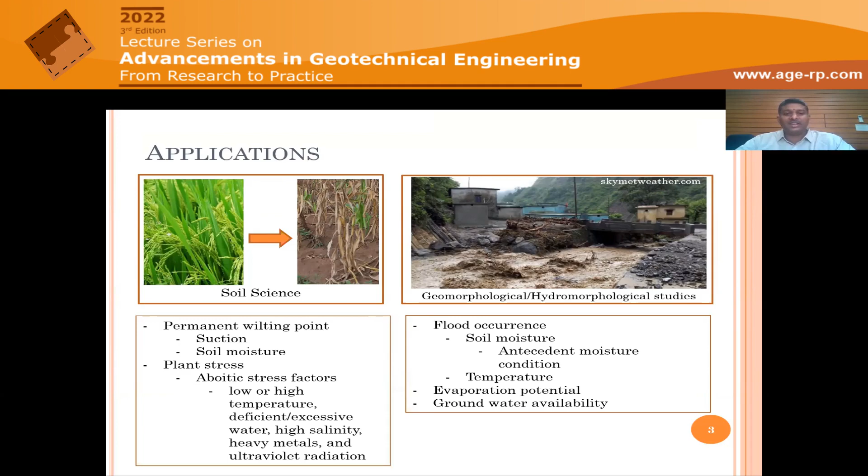This is a natural slope that exists in one part, where you have a certain vadose zone, a partly saturated zone. If rainfall takes place, there's runoff, and also some surface water gets in slightly, there's infiltration that takes place, and then this water gets into the surface water.

But due to development of infrastructure, we often construct roads or railways. To make that, we cut the slopes, and on the upstream side we try to protect the slope, while on the valley side generally this is left without any measures, or sometimes protected using breast walls.

In basic geoengineering aspects, if the weep holes are generally choked, if proper filter material is not used, or due to development of vegetation through the weep holes, high pore pressures are developed on the upstream side, and you see that failure takes place on this upstream side.

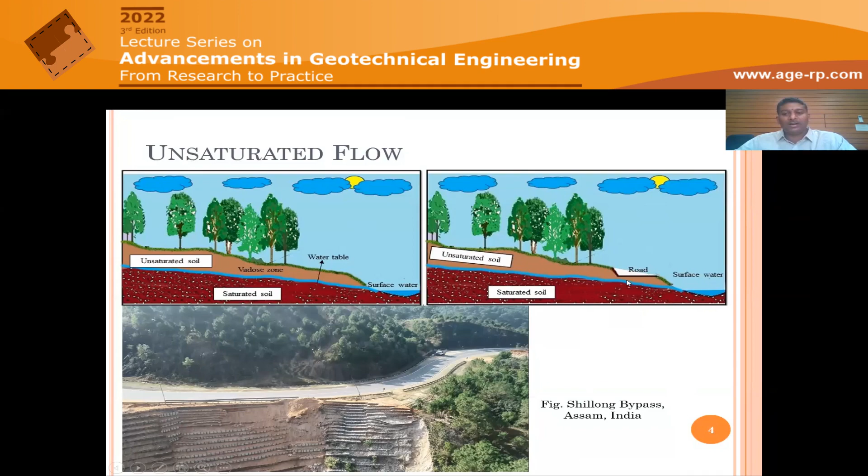If we are not well aware of the consequences of obstructing the flow of water, and the unsaturated soil principles are not met, a lot of destruction takes place, not just on the valley side or upstream side, but also underneath the road, for the first time, the soil underneath this road, the subgrade, experiences wetting under stress conditions, so you will see destruction sometimes.

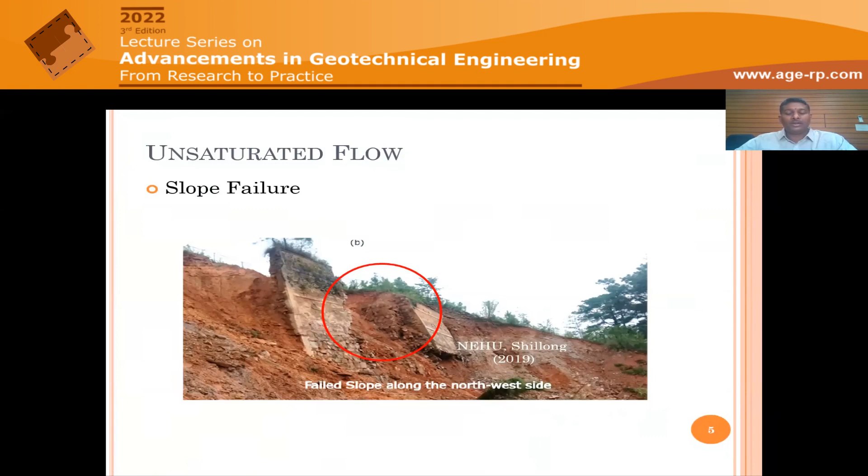This is another valley side failure in a nearby state called Meghalaya. These are some of the problems underneath the pavements, because water ingresses into the slopes and detours under the existing natural pavements, and when wetting takes place, either subsidence or heaving occurs, depending on the type of soil that exists, as Oliver would have mentioned regarding collapse behavior.

In these places, you see excessive amounts of kaolin present to deeper depths. Kaolin, when in the dry state, can take a lot of mechanical stress, but during wetting it immediately collapses. This is the destruction of infrastructure that has taken place due to that reason.

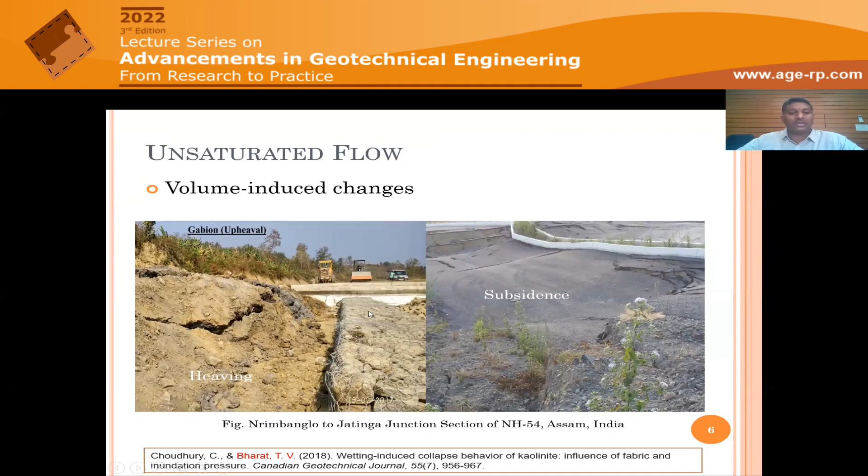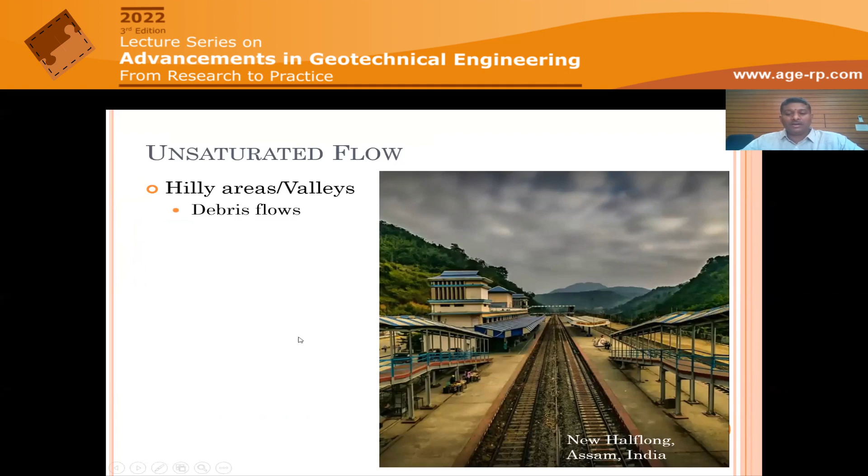When you see a lot of valleys surrounded by hills all around, there's a beautiful place in Assam where we reside, just 7 hours drive from here. The current situation, just a week ago, a debris flow took place. A lot of rain has been happening since February and March, but the rainfall during May destructed the whole thing. The entire debris flowed down the hills and submerged all the trains and a lot of passengers.

So this destruction is eventually related to the soil moisture levels in the slopes. Definitely, this has everything to do with unsaturated soil principles.

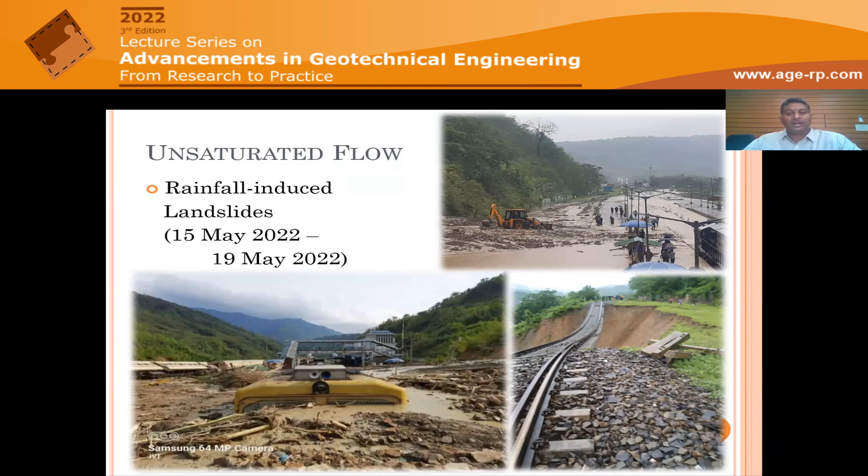Similarly, bank failures, often studied, and in landfills, the cover system made up of bentonite plus sand, if proper design is not made, the infiltration characteristics are not properly met, and because of the capillary barrier system, excessive water pressure will be generated within the top layer, and it can actually slide down and cause a disaster. So again, the unsaturated soil principles are required in this aspect.

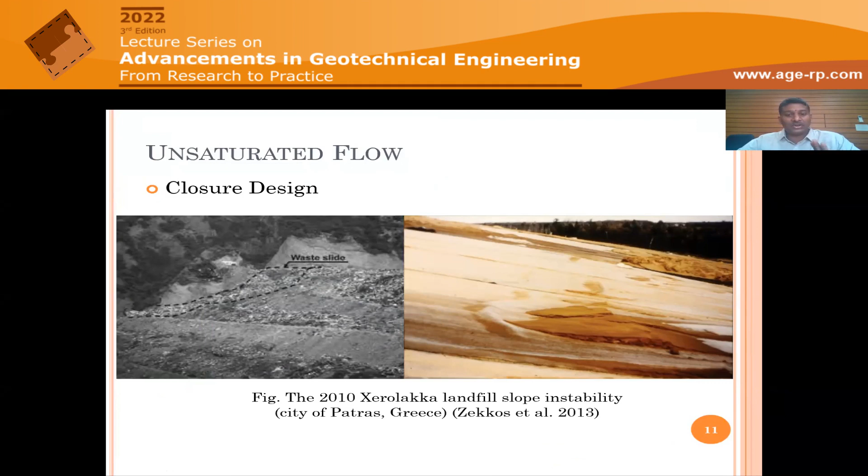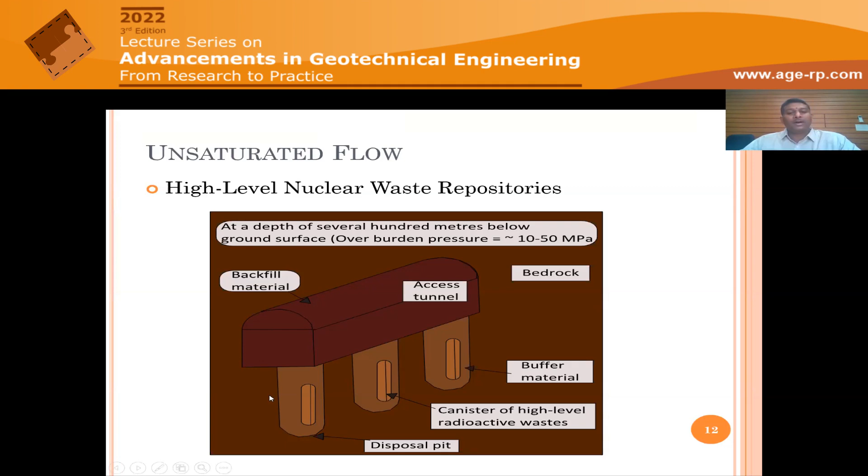And in case there's a breakdown of the canister, the high level radioactive elements that diffuse through the soils is also a very important aspect that has to be considered in the design of safe disposal of radioactive waste elements. So in this, the understanding of flow behavior through compacted bentonites is vital, and that too in our constrained environments and also partly constrained environments.

Similarly, this is an important application where in drought hit regions, to retain water in ponds, you can have a bentonite plus sand layer, and this would retain the entire water, because otherwise the water would have percolated into deeper layers, and this would not be reachable or extractable from the ground. So this can be retained using the simple mechanism of the capillary barrier.

So even after the breakthrough, because sand is dry in the beginning, water simply tips down, and again sand is in dry condition. So only small amount of water passes, because we know the saturated hydraulic conductivity of bentonite is less than 10⁻⁹ meter per second. So very small amount of water percolates through the sand layer, and then because of the capillary barrier, water gets suspended at the interface. This is a project I handled 10 years ago.

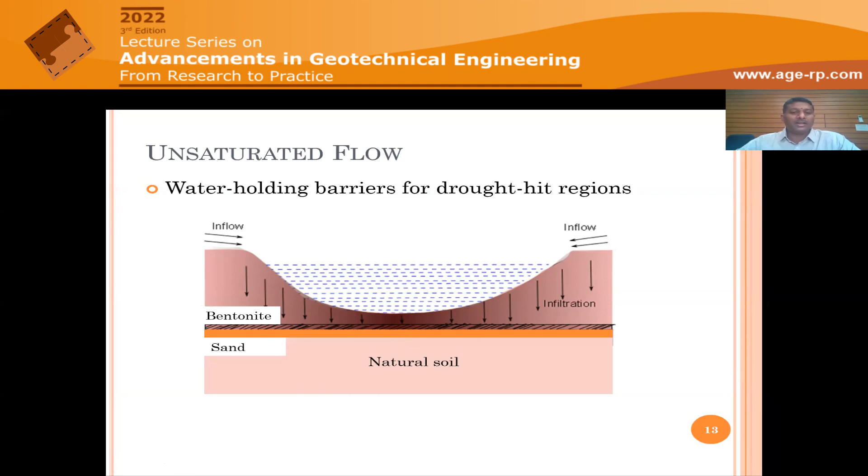And similarly, capillary barriers are catching up currently, and are popularly used in Singapore. We had a lecture by Professor Rahardjo yesterday, so I'm not discussing about this. But there are plenty of applications, and the basis for this flow behavior again comes from soil science. This is not very new, though what we have understood is after developments that have taken place in other disciplines.

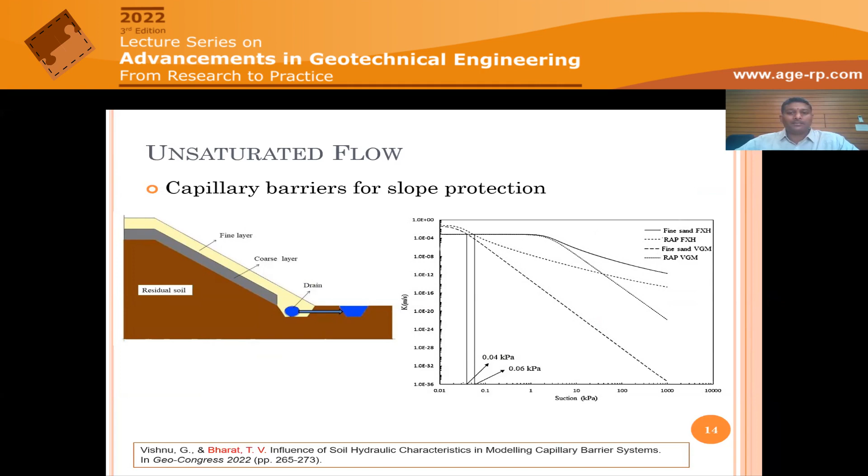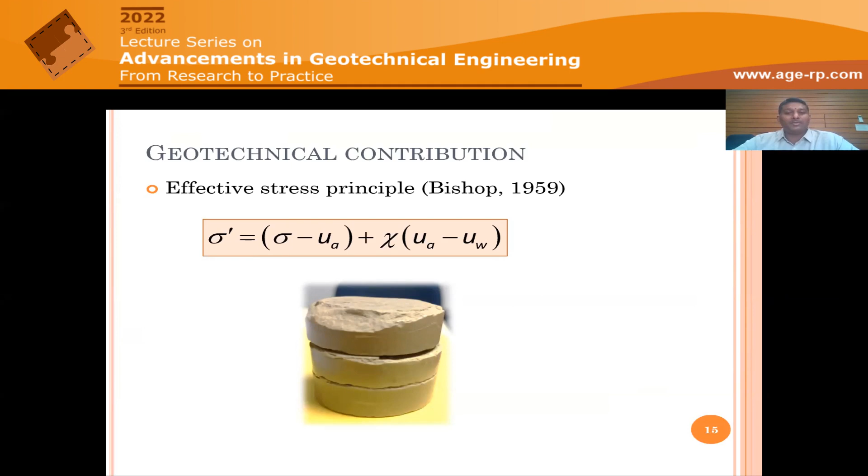So the major contribution, if I can note down, is the development of the effective stress principle by Bishop, because Bishop's effective stress principle can be used to understand the shear strength behavior of partly saturated soils, and later developments can be summarized into the same effective stress principle given by Bishop. So this could be the best, most independent contribution made in geotechnical engineering, I feel.

So coming to flow, I'm interested in discussing the flow behavior in clay soils, because a lot of misconceptions are there in understanding the flow behavior in soils in geotechnical engineering. I'll try to address those issues today.

So when we discuss flow behavior or any other behavior or observation that we make to develop a mathematical model to understand the behavior, first we need to understand these fundamental principles. We have certain governing equations such as mass conservation, linear momentum conservation, angular momentum conservation, etc. These are the fundamental equations that have to be satisfied in any formulation of a mathematical problem.

So first we have a physical observation, then you talk about a governing equation which is responsible for that physical observation. For example, if there's a flow taking place through a mass of soil, you pick the conservation of mass. And if there is swelling also taking place at the same time, you also pick the conservation of linear momentum, so force equilibrium also has to be considered. And then you formulate the governing equations.

And these governing equations are not sufficient to solve your problem, because there are material related uncertainties that come in, so you require additional equations. For that, you identify the state variables. For example, when we talk about flow through unsaturated soils, we consider the conservation of mass. If the flow takes place through a soil mass where no volume change takes place, our force equilibrium is satisfied, then we consider the conservation of mass. And if you combine with Darcy's law, what you get is the Richards expression, given in 1911, when soil mechanics was not yet formalized as a separate subject.

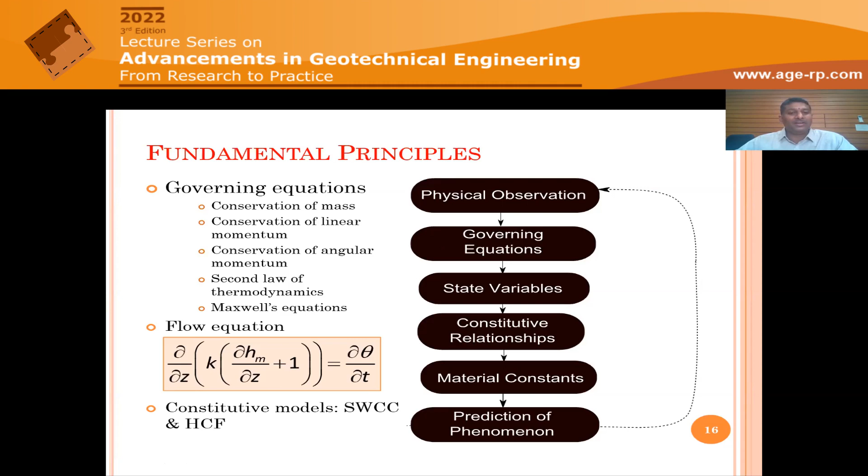Going back to the Richards expression, this is a partial differential equation, and there are two constitutive models here: one is the hydraulic conductivity function, the other is the soil water characteristic curve. The soil water characteristic curve is a relationship between matric suction head on the x-axis and volumetric water content on the other axis. This equation is in fact similar to effective stress versus void ratio, because as effective stress increases, the void ratio decreases.

Similarly here, as matric suction increases, the volumetric water content decreases. However, there is hysteresis, and the drying and wetting behaviors are different.

Similarly, hydraulic conductivity is related to matric suction, and this behavior is also similar. Often we have statistical models or pedotransfer functions to derive hydraulic conductivity functions from the soil water characteristic curve itself, knowing the pore size distribution models. Generally these are pore size distribution models.

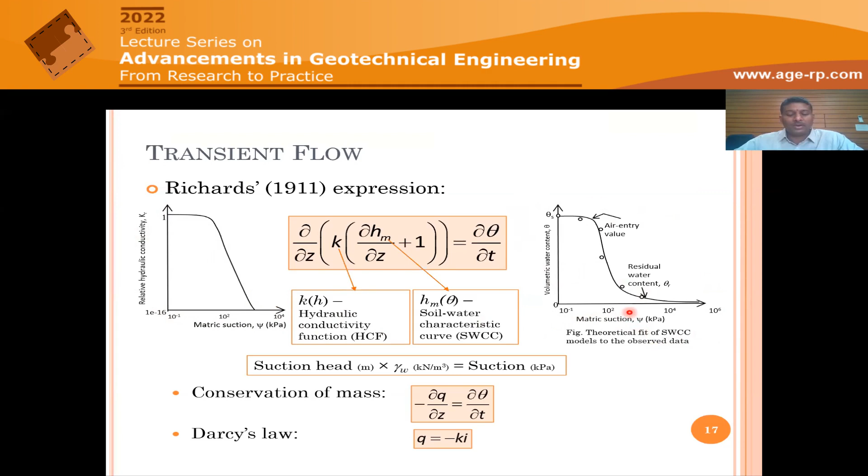Before going into those discussions of the soil water characteristic curve and other things, let me first briefly explain what is soil water potential or suction. Suction or soil water potential for partly saturated soils is a negative value.

The soil water potential is negative because of the capillary forces or capillary potential. When a capillary exists, it sucks the water because of the surface tension forces, or adhesion forces, which also predominate.

Similarly, in a clay system with a diffuse layer, when you initially have exchangeable cations on the surface and bring the particles into water, the ions can diffuse away because the concentration of ions near the particles is high compared to the bulk solution. So the ions should move away from the particles, but because of electrostatic attraction and affinity, the ions cannot move away. So then water has to come in.

So water is sucked in close to the particles, and because of the development of osmotic potential, they can swell also. The swelling mechanism in clays is because of this reason, due to the osmotic potential that is available. So there is capillary potential, osmotic potential, and similarly hydration potential.

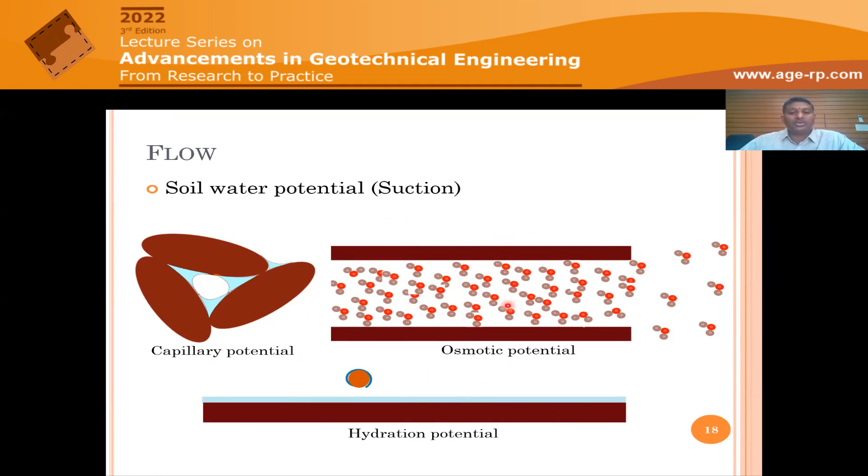Certainly there is a difference when you consider sands or other silts and sands, coarse grained soils, or even fine grained soils which are not active clays. Then capillary potential is the major dominant phenomenon controlling suction in the soils. But when you have active clays, the osmotic potential and hydration potential also significantly contribute to the suction.

Now, to establish the SWCC for the flow behavior, we have several equipments or instruments, starting from tensiometer, axis translation, osmotic technique, etc. So many things are there.

Most of the techniques have been developed in soil science, and we've simply taken and been using them. They have some practical limitations. Often the tensiometers are very handy; you use them in landslide monitoring systems where you simply push into the ground.

And then keep monitoring the suction values. Similarly, you also measure the volumetric water content or moisture content. But the tensiometer has a limitation: maximum value is theoretically 100 kilopascal, but it could be less depending on atmospheric conditions, RH, etc., because cavitation pressure controls the maximum range of tensiometer application.

Similarly, the fixed matrix porous ceramic disc, which is claimed to measure suctions in the whole range - these two are widely used currently in the field because others cannot be used in the field. They're all laboratory techniques.

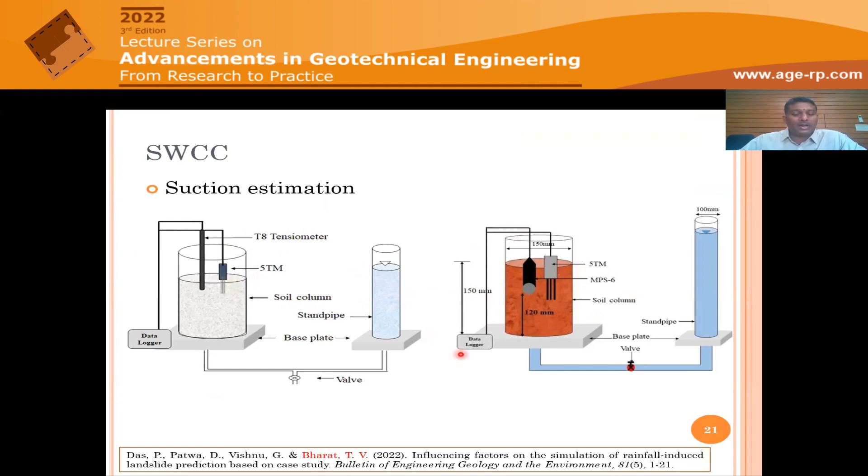If we do that, what happens? Let us see. First of all, the measured suction values are the rate at which the suction changes, because these are all instantaneous values. The equilibrium value is what you require.

They keep changing depending on the initial moisture content within the soil and also the initial condition of the sensor, whether the sensor is wet or dry and the soil is wet or dry, and what percentage of wetness or moisture content is available. Based on that, the tensiometer requires a huge equilibration time, in some cases even 10 days for compacted clay soils.

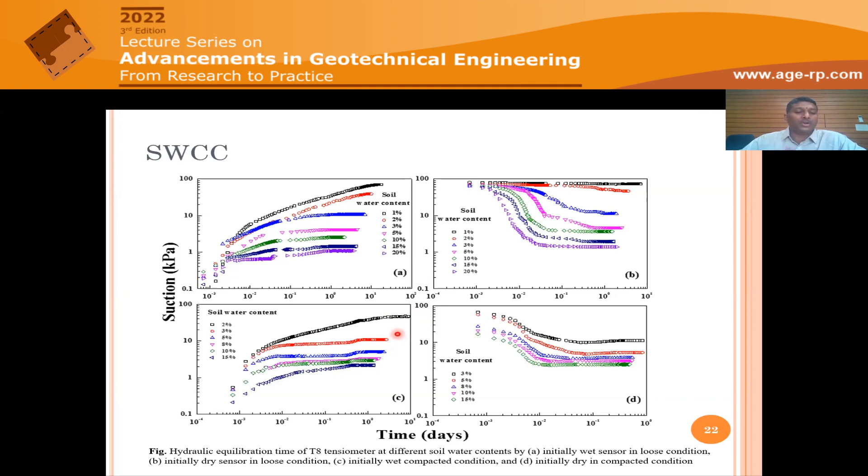Compacted clay means a lateritic soil from one of the hilly areas - we extracted the soil, compacted it in the laboratory, and measured the moisture contents as well as suction values. But here only the suction values are shown because moisture contents are fine; moisture sensors are very good to instantaneously measure moisture content. There is not a big problem with moisture measurement, but suction measurement is a huge issue.

If I try to establish volumetric water content versus suction in this manner, it's a very fast, instantaneous process - within 30 minutes I can obtain the entire suction profile and water content profile. Then I can draw the suction values corresponding to a given water content and establish the soil water characteristic curve. This is an instantaneous approach versus an equilibrium approach which takes around 60 days for one particular soil, because it has reached true equilibrium.

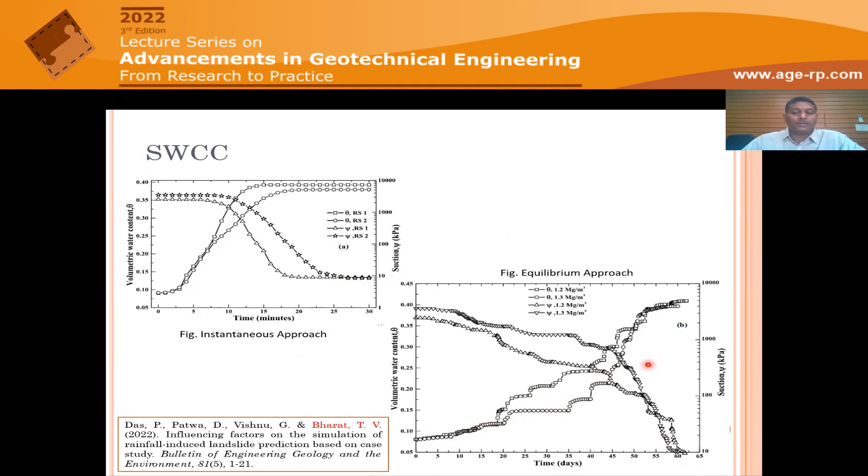After that, again you change the water content of the soil, and again you change the water content of the soil. So it takes time in each step, and in this way it takes an enormous amount of time.

What you see is when you predict the landslide or the factor of safety, even the instantaneous approach, which is highly conservative, doesn't predict the landslide until the 220th day or so. But the equilibrium approach predicts it within the 27th day or so, and this exactly matches a field observation - there was a failure that occurred in Meghalaya.

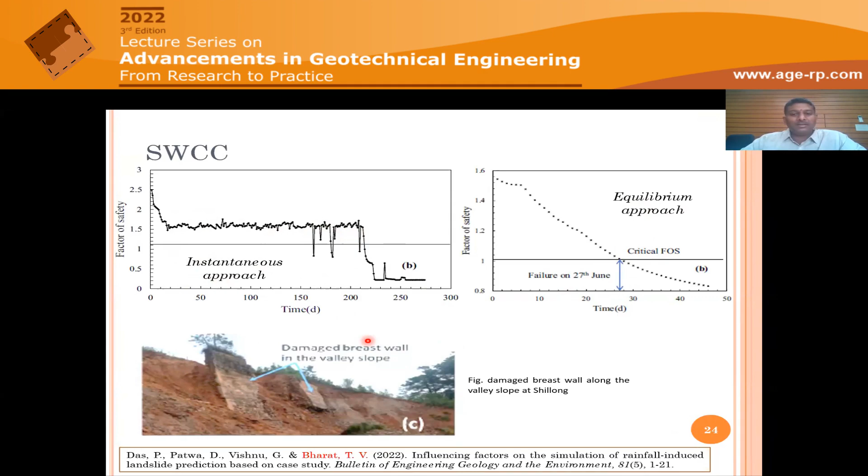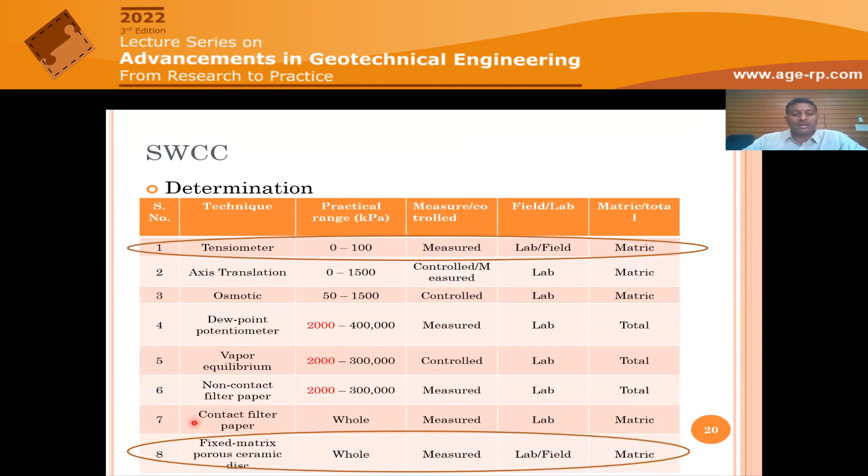So it seems these approaches are similar for the fixed matrix porous ceramic disc too. In fact, this takes even more time, especially in case of active clays. With this observation, let us move on.

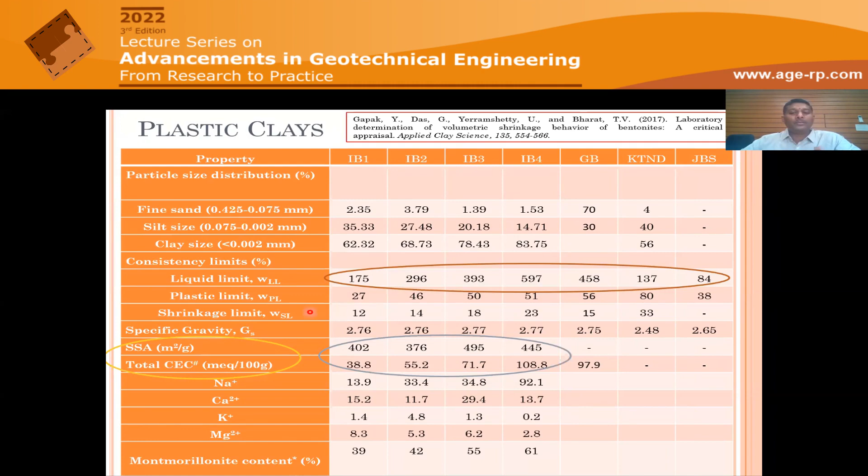Now the question arises: if the estimation of SWCC is so complicated in case of silts or low plastic clays, then what happens in case of high plastic clays? Because these two constitutive relationships are important for estimating the flow behavior through the soils.

There's one particular technique called the osmotic technique, which is also available in the literature and quite handy in those cases, because plastic clay layers can simply be put in a semi-permeable membrane, tied, and then placed in the polyethylene glycol solution, PEG solution.

PEG solution has a certain concentration, and the initial state of the soil could be anything. For example, here the Indian bentonite is placed at water content 1.5 times the liquid limit water content consistency, so this is a fully saturated soil.

When it is kept in the PEG solution, the PEG solution has a certain concentration, so it has a certain potential, and potential here is 0. Negative potential is not there, there is a 0 potential. So here potential is lower because of higher concentration of PEG solution.

Because of the potential drop or potential difference, water is drawn from the soil and comes out, and the PEG solution concentration changes until there is an equilibrium between the potential in the soil and potential in the PEG solution. So if you can measure the potential or suction value or the concentration of the PEG solution, we can understand what is the suction in the soil at equilibrium.

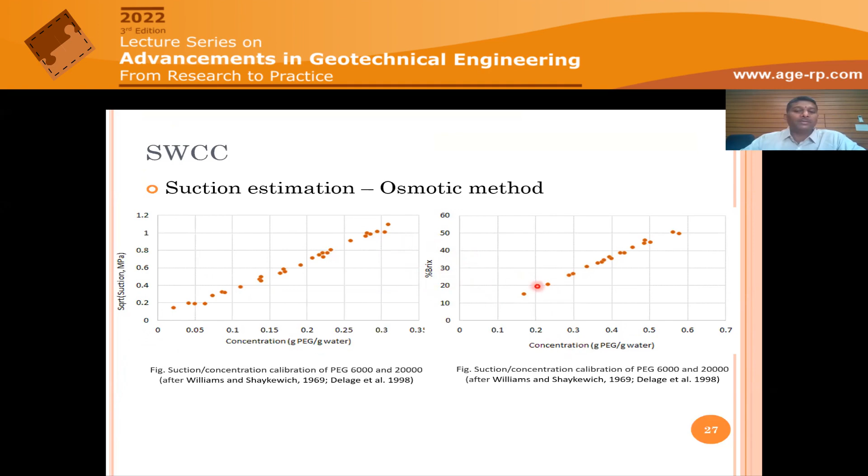You can measure the Brix index, which is in fact used for alcohol quality, and the same thing could be used here to measure the concentration. From the concentration you can estimate the suction values.

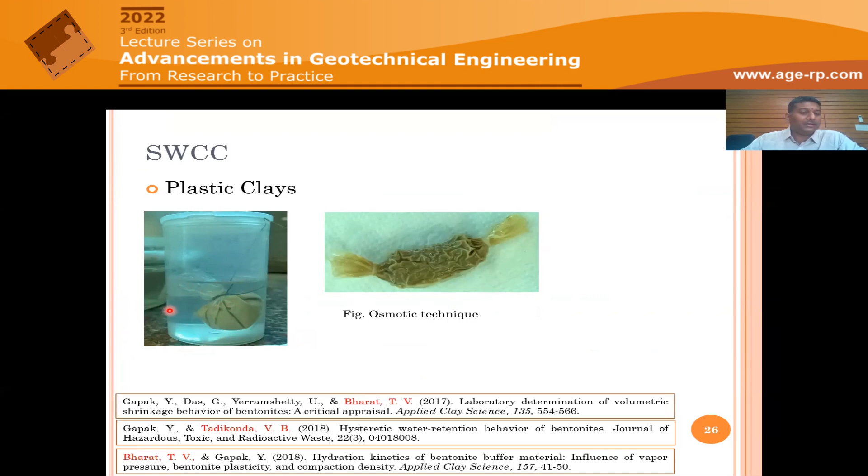Similarly, there is a limitation again: you have a maximum concentration that you can go for, and also the pore size cutoff value of the membrane. Here you can hardly go for about 2000 kilopascal, but if you go for a 6000 cutoff value of the membrane, and have a PEG molecule size larger than that, you can even go for 4000 kilopascal suction range. Beyond that, if you want to go, you require a vapor equilibrium technique.

The vapors of these salts can exhibit a huge, very low RH, as low as 11.3 RH, and the corresponding temperature could be 25 or anything that could be maintained. From Kelvin's equation, you can estimate what is the suction that is imparted on the soil.

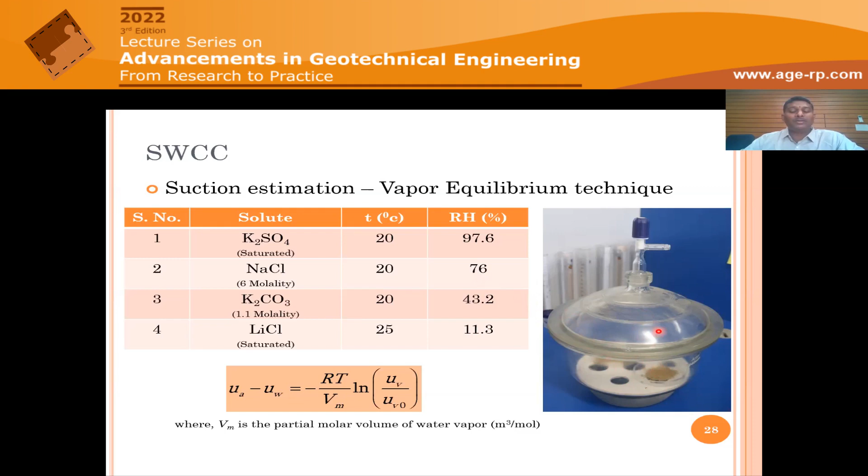You will have saturated salt solutions underneath, and you create an RH environment, just like in an air-conditioned room. When you are sitting, you feel thirsty because RH is low, around 70 or so, so that much suction is exerted on your skin pores. Similarly, the soil is experiencing a certain RH, so water has to leave because it has to come to equilibrium with the atmosphere. Similarly, you can estimate the suction values.

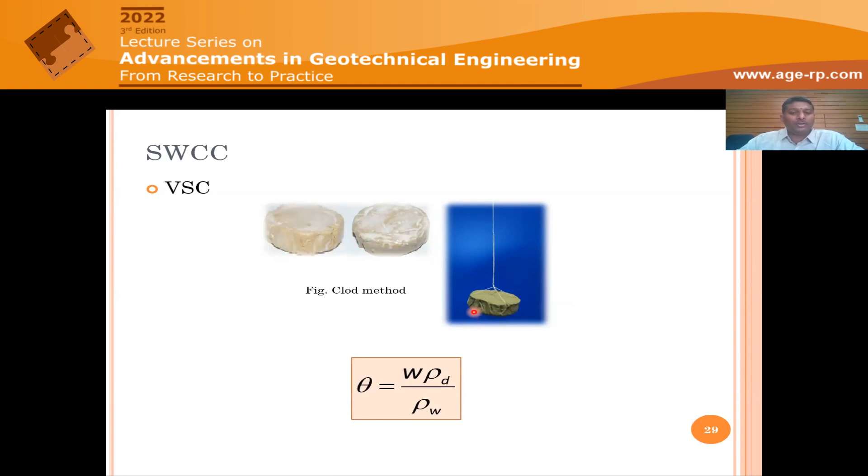But in case of these active clays, you also require the volume changes that happen, which can be estimated independently using the clod method or something, where you can coat it with Fevicol or any other glue, polyvinyl acetate glue, PVA glue, and then directly dip it in water or kerosene, and measure the volume, the displaced volume. From that you can estimate how the volume is changing in the soil sample.

But here, one thing we have done is the volume is not constrained, it is simply allowed to change. This way, in fact, you can get a number of cycles: there is an initial drying, and then you can get a primary wetting, primary drying, secondary wetting, all those cycles you can get.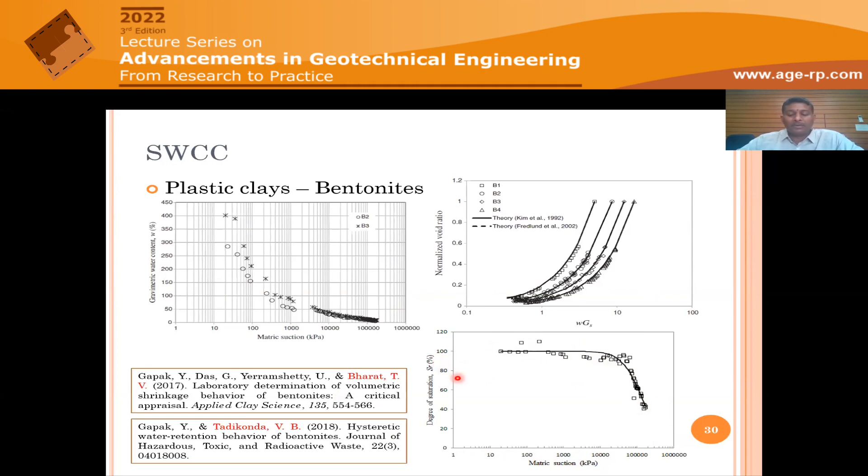But there is a catch, I will soon explain. So what happened in compacted conditions? In compacted conditions, similar experiments can be conducted with PEG solution and vapor equilibrium techniques, where salt vapors are circulated around the clay sample so that it comes to equilibrium and achieves a certain suction value or water content.

By weight, we can measure the water content, and using the salt solution RH, the salt solution can directly be taken and kept under the WP4 or dew point potentiometer, and you can measure the RH values directly, and estimate what is the suction that has been imparted on this clay sample, and establish the soil water characteristic curve.

But then one issue with the PEG solution osmotic technique is that longer exposure of PEG solution with the membrane can cause damage to the membrane, and PEG can enter directly into the soil. Especially after 10 to 12 days, the PEG solution can directly enter because of the attacks of the microbes.

There's a lot of research going on currently, but in the 70s there was already a solution. You can use penicillin along with the PEG solution to prevent microbe attack, and then it can be used for 30 days or so, because reaching equilibrium takes longer in a compacted bentonite system.

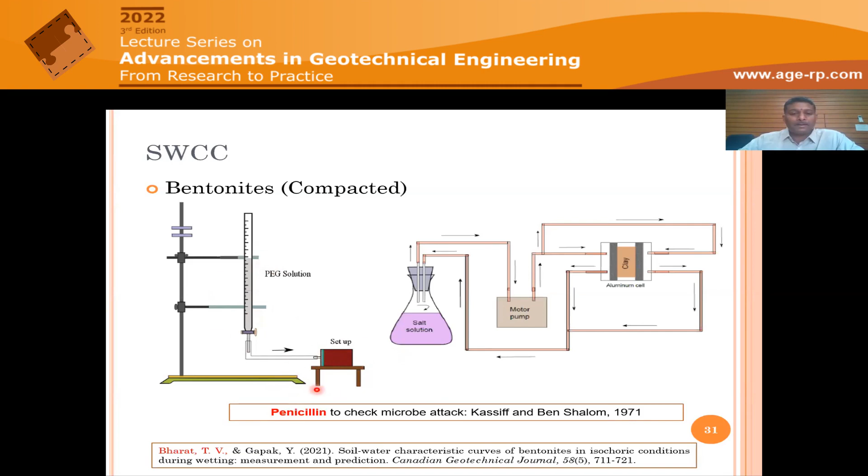For compacted bentonites at different densities, I'm showing you the relation between water content and suction values, from osmotic technique and vapor equilibrium technique for different densities. When you directly convert into degree of saturation versus suction, it's easy because volume is constrained and constant in your case, so I don't need to estimate volume changes using any other technique. Since volume is constant, I know the void ratio, the water content, and the specific gravity or density of solids.

Interestingly, if I estimate this, the degree of saturation goes beyond 100%. This is not an isolated observation from our group; other researchers, like Villar and others, have also observed the degree of saturation going beyond 100% in compacted bentonites. So what could be the reason? This has been a topic of great debate and interest in soil science, mainly attributed to changes in the density of water.

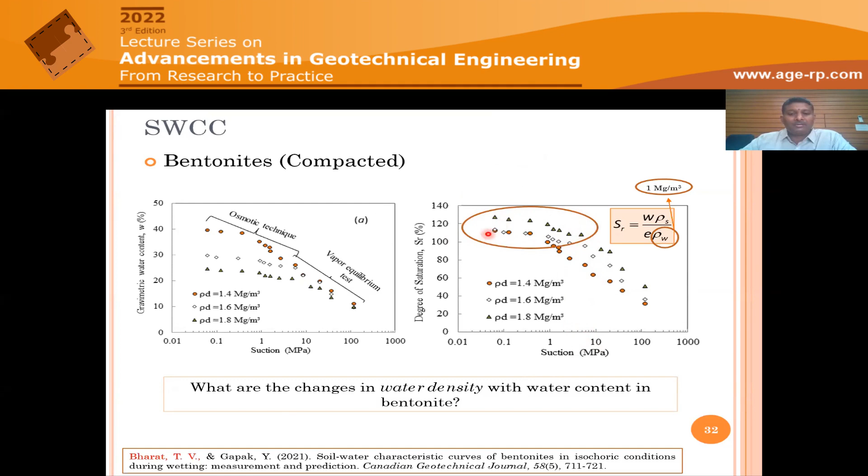The density of water considered here is 1 megagram per meter cube. When you consider that, the degree of saturation estimated close to the saturated state is around 130%, for higher density, and lower for lower density. It meets the 100% saturation line nearly at 10 MPa, or between 5 and 10 MPa. This observation is very interesting and is attributed to changes in water density.

In the literature, since the 1960s, soil scientists have observed that water densities can increase beyond 1, even up to 1.4 megagram per meter cube, where water content is less than 10% in bentonites, montmorillonite clays, and kaolinites. The density approaches 1 megagram per meter cube or less with increase in water content, as observed by Richards and Bouazza using several experimental observations, including helium gas displacement pycnometry and buoyant force measurements, which measured how water density changes with soil water content.

But most of these observations are simply from a few particles, measuring how density changes—not from a compacted system with micropore and macropore structure. These are some observations on bentonites and MX80 bentonites showing how water density changes; with increase in water content, they approach 1. This is an observation made by Lloret for FEBEX, going beyond 1.

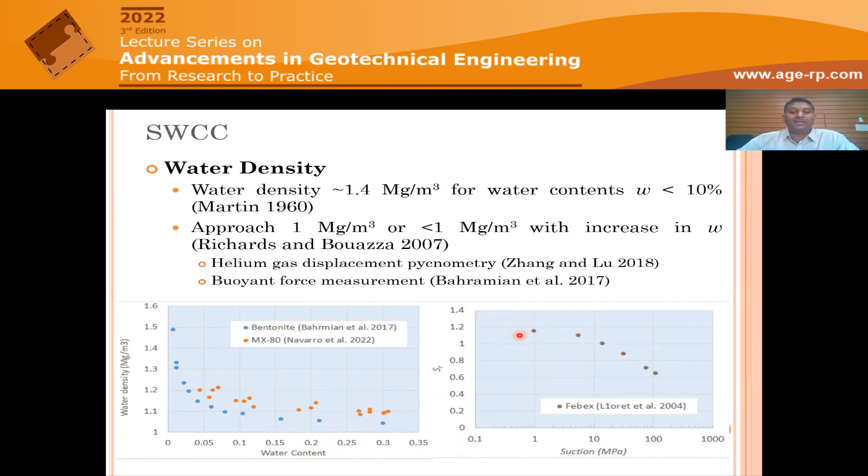There were some attempts to correct the degree of saturation for clays, proposed by Villar in 2005, based on the concept of liquid multilayer structuring. Close to a clay particle, the first layer of water strongly adhered to the particle has a density close to 1.8 megagram per meter cube. Moving away from the particle, the water density decreases and reaches 1 at the bulk solution. You take mean values, since multiple layers of water molecules exist around the particle—first layer 1.8, then an average of 1.8 and 1.5, and so on—to make the correction.

But with such corrections, the important observation is that the water entry point, similar to air entry suction, is nearly negligible—there is essentially no water entry for compacted bentonites. Is that strange? Water entry should be very high, around 5 to 10 MPa for bentonites, but here it's negligible, maybe just a few kilopascals.

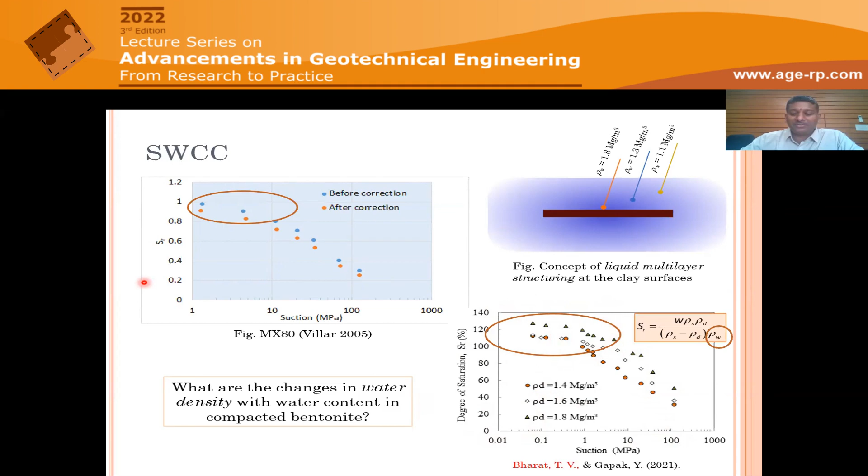So there is a huge debate taking place on how to adjust or understand this behavior, and currently this is inconclusive. With this inconclusive statement on the SWCC of compacted bentonites, I move ahead to explain the hydraulic conductivity function, because these two constitutive relationships are required for the flow behavior. Just reminding you why this is required.

Coming to the hydraulic conductivity function, it is a relationship between hydraulic conductivity and suction. The only popular method employed in the laboratory is the multi-step method, but this is not suitable for clays. It is best suited for sands or other soils, because the volume of water that comes out due to application of suction is very small, cannot be measured, and takes enormous time in the case of silts. Good luck if you want to measure it for active clays.

It's not possible, right? So this expression is actually an analytical solution of Richard's expression, considering D constant with Z. This is given by Gardner, and this expression is often used in the multi-step outflow technique for estimation of conductivity.

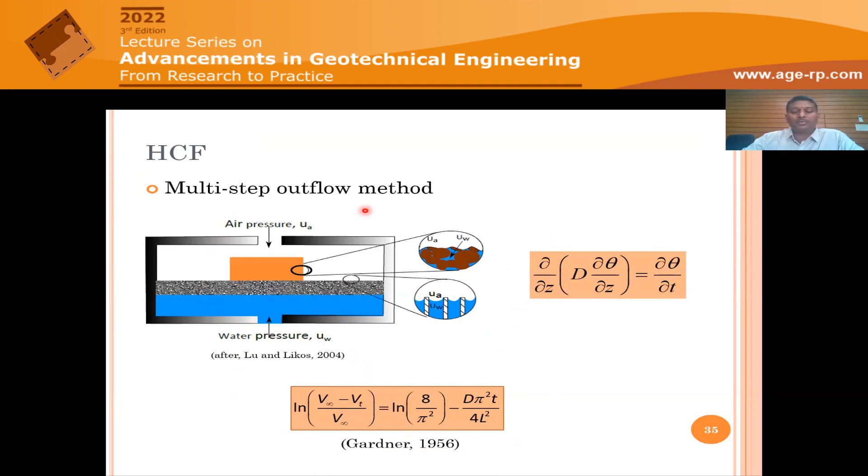Another method receiving a lot of traction in geotechnical and geoenvironmental engineering for compacted bentonites is the instantaneous method. Since 2008 or 2009 it has received a lot of traction, but if you trace back the origin, it's from Daniel, 1982-1983. Further back, it goes to the 50s or 60s. The method involves very simple steps.

If this is a compacted bentonite column or sample, you cannot have a big column because the flow behavior is very slow; flux is very slow. So you cannot afford a very long column—this is a small column. Psychrometers are placed at different locations on the perimeter of the column, and a water source is allowed to go in, with a vent. Instantaneously, you measure the relative humidity at any given spatial location within the soil sample while water flow is taking place.

So instantaneously you can draw how the water suction value is changing with time. Once that is known, you can establish the gradient by understanding how suction changes with spatial location X. Then the average flow rate can be obtained by integrating how much water has passed beyond a particular location, say Xi, to L—beyond this location, what amount of water accumulated over a given time. Based on that, you get the average flow rate, and by using Darcy's law, you get the hydraulic conductivity.

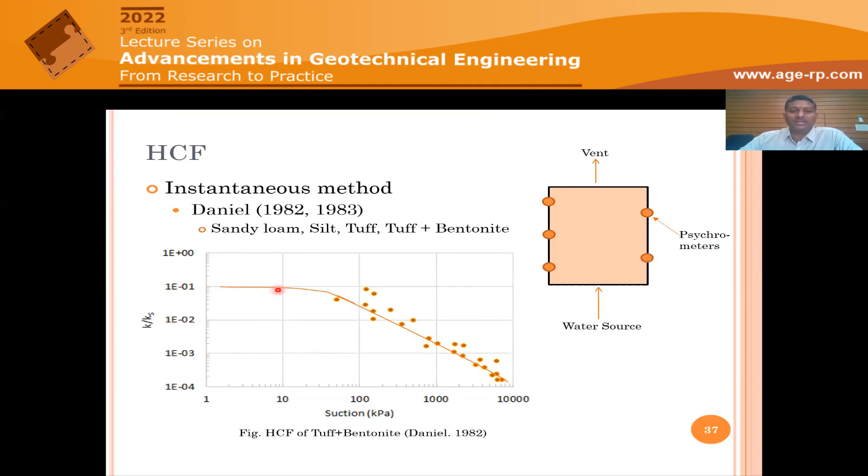This method was used for sandy loam, silt, tuff plus bentonite, and other soils in the 80s, and it gained a lot of traction for estimating the hydraulic conductivity of bentonites. If you look at hydraulic conductivity or relative hydraulic conductivity with respect to suction, the changes are as expected, because several orders of magnitude of hydraulic conductivity change with increasing suction—up to 10 MPa. So this is an expected trend, a typical hydraulic conductivity function curve.

So if you think this is an experimental error, but this is claimed to be an important breakthrough in the science, a lot of following works in fact also reported and supported this statement that hydraulic conductivity will increase with increase in the suction, that too at what suction? At around 70, 80 megapascal suction.

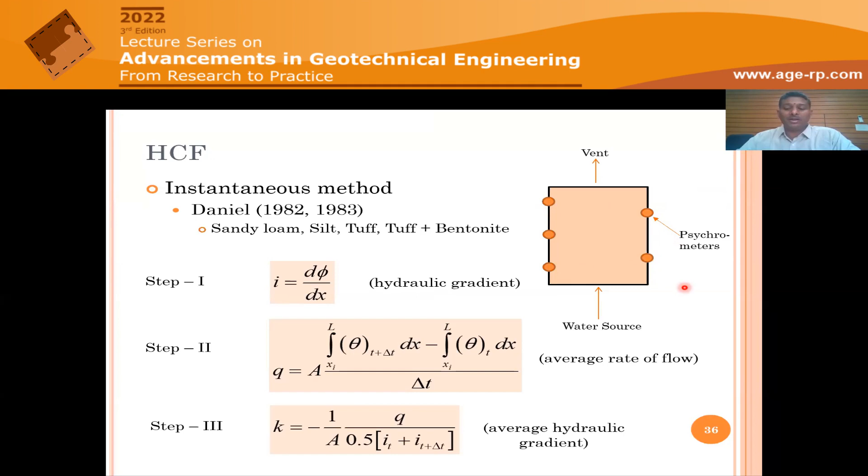But here you are measuring instantaneously the RH values, that too in bentonites, which generally takes several days to come to equilibrium with your instrument, but you're completing an entire test within few minutes or few hours. And that is the error that is actually propagated, and then you started observing that with increase in the suction, hydraulic conductivity is increasing.

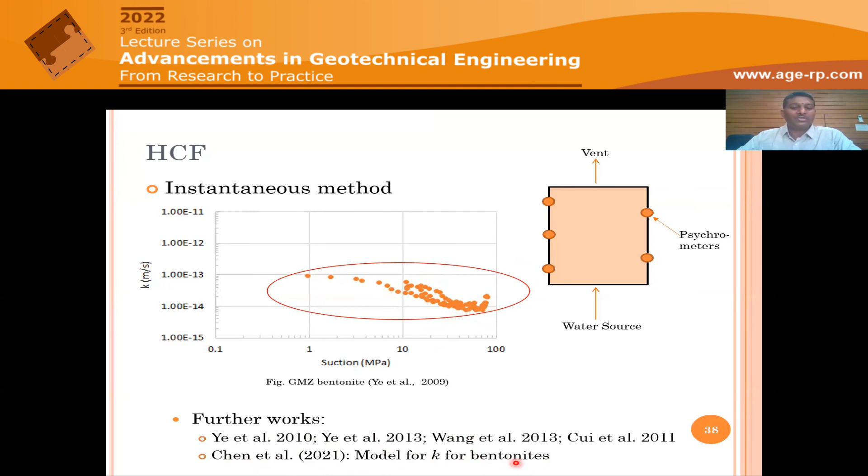In fact, the interesting part is that there are several researchers, without understanding, maybe falling prey to this particular observation, who developed models for hydraulic conductivity changes, for decrease and increase with suction values. This is published in Geotechnical and other reputed journals. These things are available.

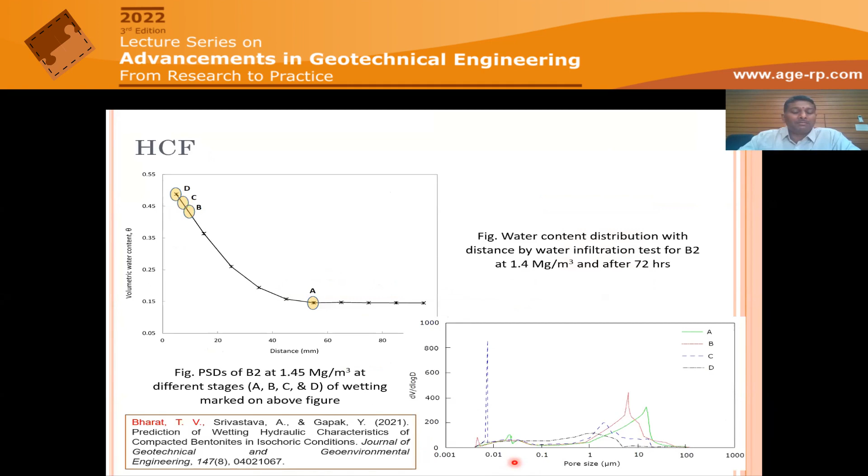So I believe that this is purely a problem with the measurement of suction instantaneously. And if you adopt the proper technique, you see that with increase in the suction, the hydraulic conductivity is changing in the manner you expect. A standard trend is followed.

But the question comes now, how sure are you about this d-theta by dh or dh by d-theta? Because diffusivity is fine, we have simply measured and estimated it from water content observations. But hydraulic conductivity can only be established using the slope of the SWCC. But the slope of the SWCC for compacted bentonites is inaccurate because the water density is not corrected. How sure are you about it?

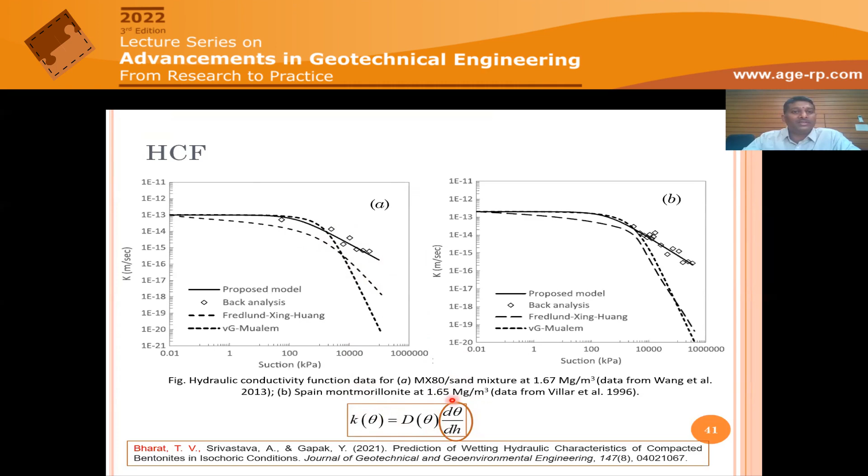But whatever the kind of slope you consider, the trend will be similar. Although it may be decreasing faster or slower, the trend is similar. It cannot increase with increase in the suction. So still, I consider that this hydraulic conductivity is not accurate enough because the slopes may not be accurate without considering the density of water effect.

So what I propose is, why go back to hydraulic conductivity? Why don't we use the diffusivities itself? The diffusivity, when considered with volumetric water content, is consistently constant for any given bentonite quality. So for bentonite, the diffusivity is constant with change in water content, so you will have a unique diffusivity. But if you see fine sand or other soils, the diffusivity changes several orders of magnitude with change in water content. That is not the case with bentonites.

So that means your Richard's expression turns into a Fick's diffusion equation. Your hydraulic diffusivity turns to self-diffusion of water in bentonite. So now this is much easier. Because we have dealt with contaminant transport problems where the diffusivity or diffusion coefficient of several species have been estimated, here the same way the diffusion coefficient of water species can be established through bentonites, because the pore structure or adhesion forces will predominate or dictate what the diffusion coefficient should be.

And when it is constant, you can use similar methods to what we use in contaminant transport equations to establish the D value, and now you can solve transport problems without going for SWCC. Here you can overcome the estimation of SWCC, and there is no requirement of understanding hydraulic conductivity. You can estimate the D values and predict the flow behavior, or theta variations across the soil sample, so how fast this is moving can be established or understood.

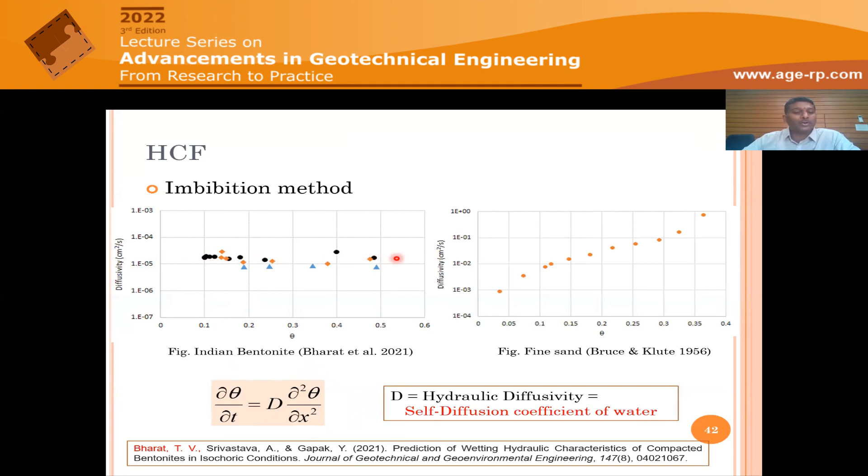So a lot of research is required in this direction. We have done some experiments and independently estimated the D values, which are coherent with the estimated diffusivities from the imbibition techniques. This is not published yet, but soon it will come in the limelight.

With this, I conclude that the instantaneous estimation of suction values by sensors is erroneous. We should be very cautious in doing that, because in most field applications like capillary barriers for slope protection, or cover systems of landfills, you embed a suction sensor and establish continuous measurement of suction, and based on that you assess whether stability is met or not.

But instead of that, if you can measure the water contents, water content sensors can quickly measure the water contents with much less response time. So based on the water contents established through the SWCC, you can get the suction values for establishing factor of safety.

Coming to compacted bentonites, the SWCC poses a big challenge because of water density uncertainties, since water density values are known to change with the amount of water content, especially when the pore structure is evolving with changes in water content. It is very difficult and complex to understand how the water densities are changing.

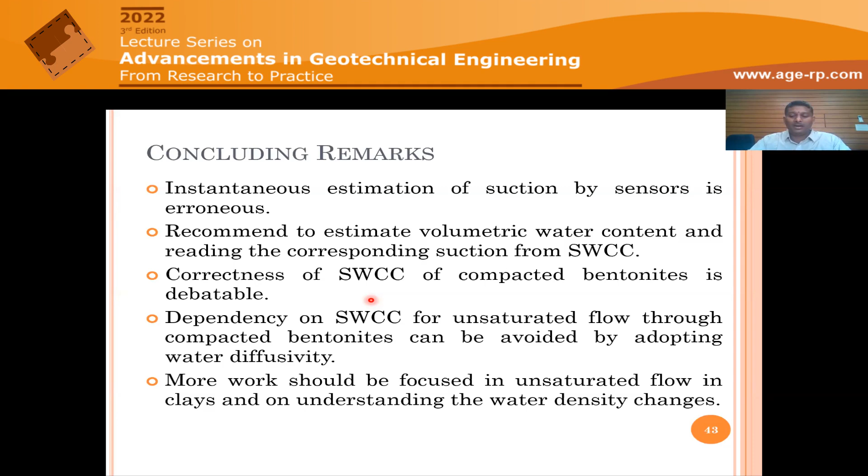With this, I conclude, and I hope the presentation is useful for those working in unsaturated soil flow behavior. This is, I should say, the backbone for my research - these are my research students. I thank my students and the funding agencies.

In this case, instead of correcting the water density for compacted bentonites, because that is very difficult at present and not completely understood - there are certain procedures laid down, but I felt they're incorrect, or at least I don't agree with them, because the water entry pressure is negligible for compacted bentonites after correction. If you see, they are just a few kilopascals, which is not expectable for compacted bentonites.

So at present, what I'm suggesting is that we can completely avoid SWCC and directly estimate the diffusivity or diffusion coefficient of water molecules. There are independent tests - one is the imbibition technique, and another one we haven't published yet, but it is similar to what you do for contaminant transport.

From there, you can establish the diffusivity, and you can solve the flow equations - the diffusion equation itself - because you know the diffusivity is same as the diffusion coefficient of water. So now you can solve and get the flow problem solved. It could be 2-dimensional or 3-dimensional. Anything can be solved because diffusivity is the same in all directions if you have a homogeneous compacted bentonite.